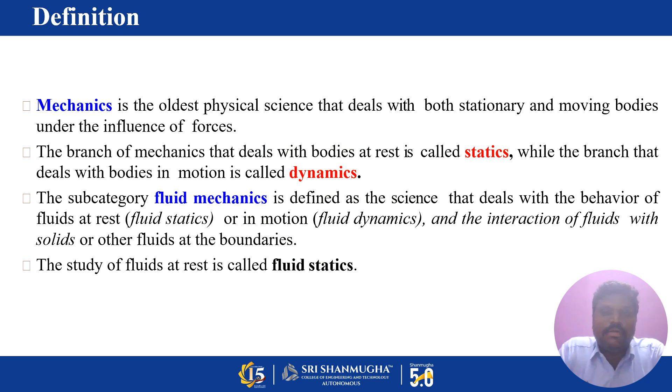The study of fluid in motion, where the pressure forces are not considered, is called fluid kinematics. Where the pressure force is predominant and is considered in motion, the branch of science is called fluid dynamics. It has been divided into several categories, especially the study of motion of fluids that are practically incompressible.

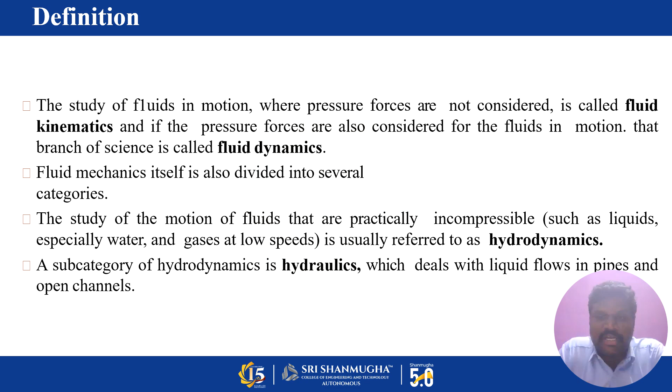Incompressible means the density of the fluid does not change from time to time or place to place, especially liquids like water, and gases at low speed; this is usually referred to as hydrodynamics. A subcategory of hydrodynamics is hydraulics, which deals with liquid flowing in pipelines or open channels, for example rivers, streams or channels. And gas dynamics is completely focused on gas which is flowing through pipelines or

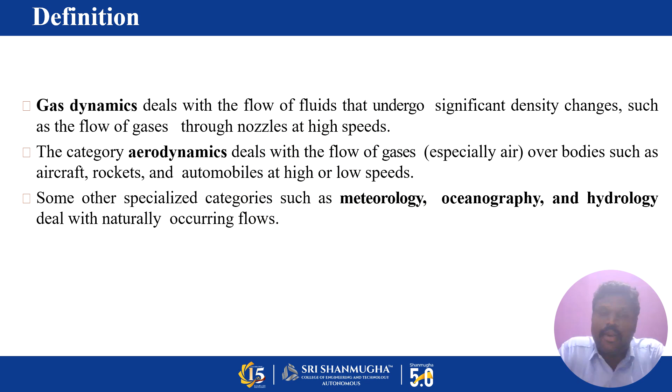nozzles at high speed. In this case it is a compressible fluid, so the density will vary from place to place and point to point. The category aerodynamics deals with flow of gas, especially air, over bodies such as aircraft, rockets, automobiles at high or low speed. Some other specialized categories such as meteorology, oceanography, hydrology deal with naturally occurring flows.

Here let me go. What is fluid? A constant shear force is applied in the portion. Here this is a plate and here it is a plate. A constant shear force applied to a solid boundary, see here this is a force, eventually stops deforming at some fixed strain angle, whereas a fluid never stops deforming and approaches a certain rate of strain.

Here this is the contact area. In between the two surfaces, the liquid is flowing. Here the surface area is A, and shear stress tau is equal to force by area. So because of this movement of fluid between the two plates, the plate eventually stops deforming at some angle; that's called shear strain. We can indicate it by the term alpha.

So here is the deformation of a rubber eraser placed between two parallel plates under the influence of shear; one plate is moving this side. In between the movement of these two plates, the rubber is deformed. So the deformed portion is at the surface. At the surface, because of this deformation, if the force is acting, shear stress will be developed.

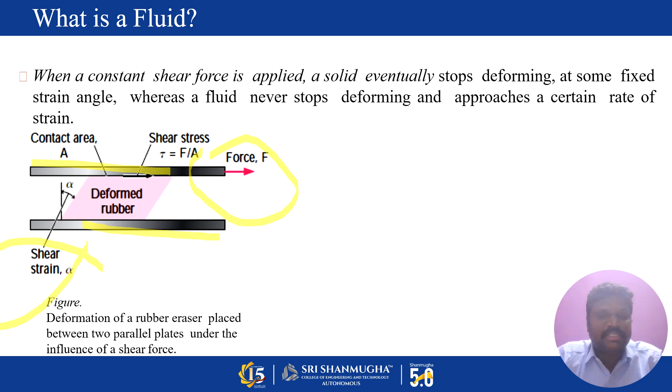Next, in a liquid, molecules can move relative to each other, but the volume remains relatively constant because of strong cohesive forces between the molecules. As a result, a liquid takes the shape of the container and forms a free surface at the top. A gas expands until it encounters the walls of the container and fills the entire available space.

This is because the gas molecules are widely spaced and the cohesive forces between molecules are very small compared to a liquid. Unlike liquids, gases cannot form a free surface because the gas fills everywhere, but if a liquid is filled in the container, above the liquid it has a free surface.

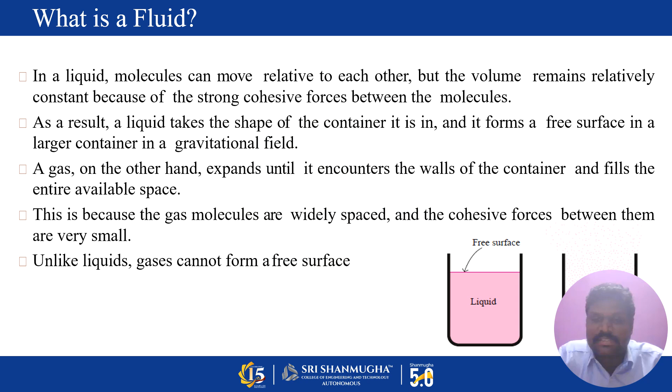There are some differences between liquids and gases. Liquids are difficult to compress and often regarded as incompressible, and as I have said, for incompressible fluids the density is constant. Gas is easy to compress; the change of volume is large, cannot normally be neglected, and is related to temperature. If the temperature of the gas varies, the volume varies.

A liquid occupies a fixed volume and will take the shape of the container. A gas has no fixed volume; it changes volume to expand to fill the containing vessel. A free surface is formed if the volume of the container is greater than the liquid. A gas completely fills the vessel so that no free surface is formed.

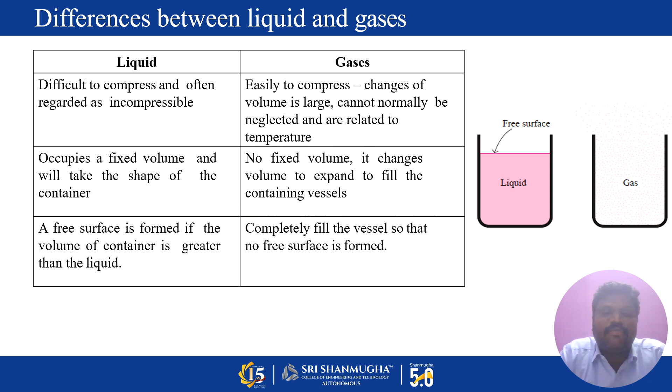Some of the application areas of fluid mechanics. Mechanics of fluids is extremely important in many areas of engineering and science. For example, biomechanics: blood flow through arteries and veins, airflow in lungs, flow of cerebral fluid. So next we'll go for households.

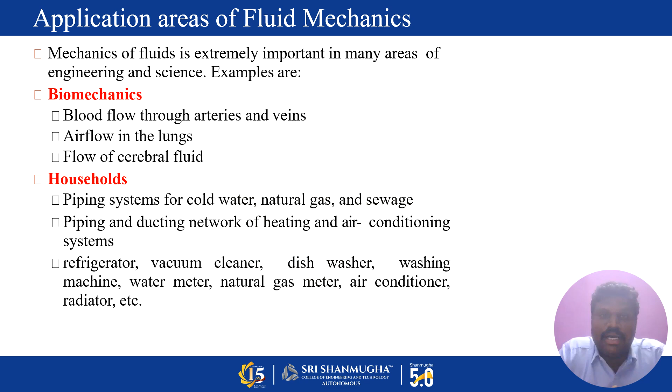We already know the piping systems for cold water, natural gas, sewage, piping and ducting networks of heating and air conditioning systems, refrigerator, vacuum cleaner, dishwasher, washing machine. These are some common examples where fluid mechanics concepts are involved in households. Next, meteorology and ocean engineering: movement of air currents and water currents.

In mechanical engineering, design of pumps, turbines, air conditioning equipment, pollution control equipment, etc. And also the design and analysis of aircraft, boats, submarines, etc. In civil engineering, transport of river sediment from one place to another because of the movement of water or even air. Pollution of air and water, design of piping systems, flood control systems.

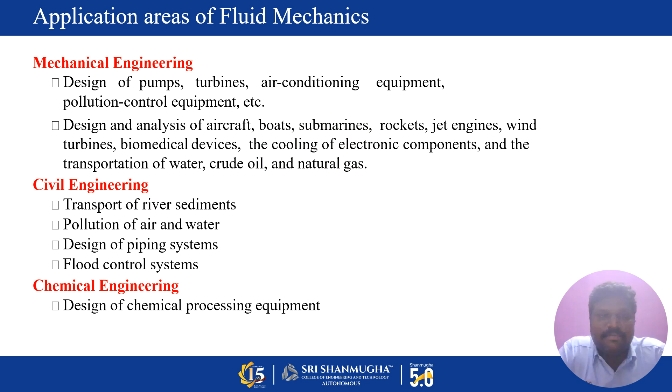In chemical engineering, chemical processing equipment; mechanical we have already discussed. These are the application areas of fluid mechanics. So the number of fluid engineering applications is enormous: breathing, blood flow, swimming, pumps, fans, turbines. Here I've just given some examples of missile aerodynamics and automobile aerodynamics.

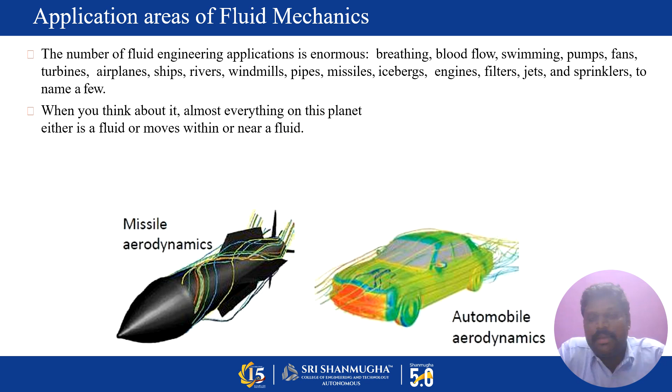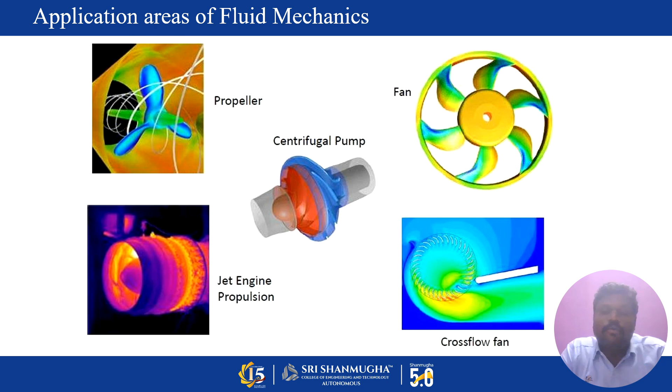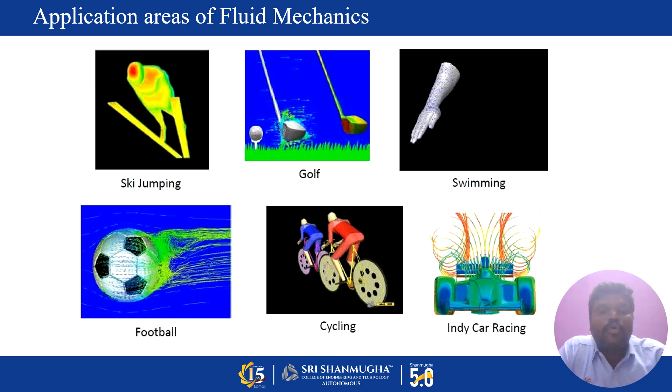We have a propeller, a fan inside a pump called an impeller, as well as a turbine, jet engine propulsion, cross flow fan. These are other application areas, especially in sports: ski jumping, golf, swimming. Swimming gives the best example of the movement of water forward and backward. Football, cycling. These are some common and typical examples of applications of fluid mechanics.